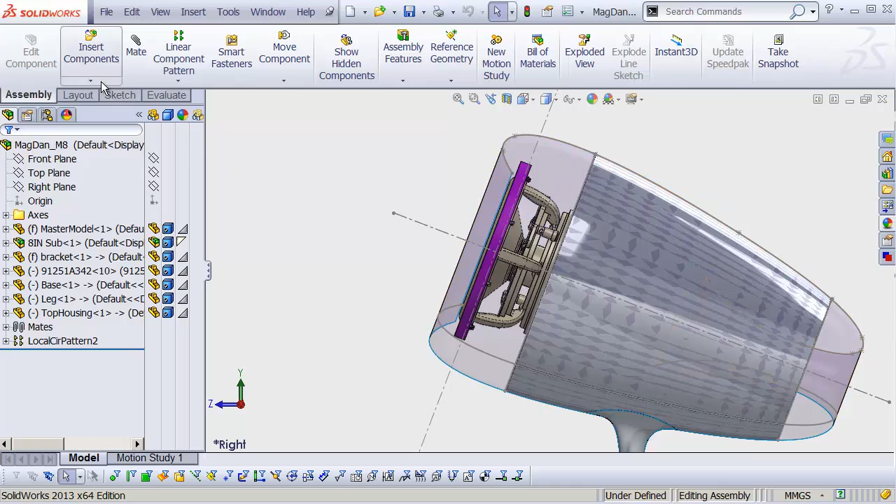Front plane, same as always. We'll rename this front nose. I don't know, I'm making up these names. I'm going to right-click that and save part in external file and hit OK. Same as always, we'll open that up, insert our master model, and hit OK.

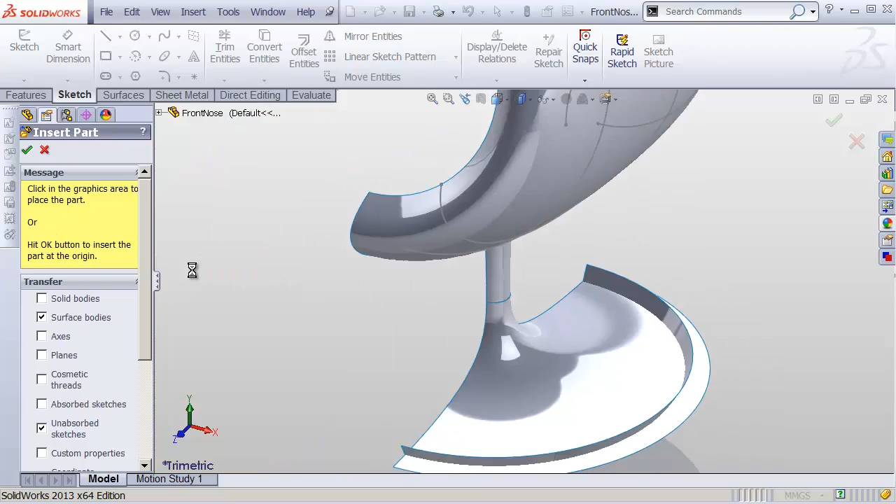We just need the surface bodies and unabsorbed sketches. And we actually only need that big fuselage piece. We don't need any of these other pieces, so we'll just delete those out right off the bat, just to clear this all the way out.

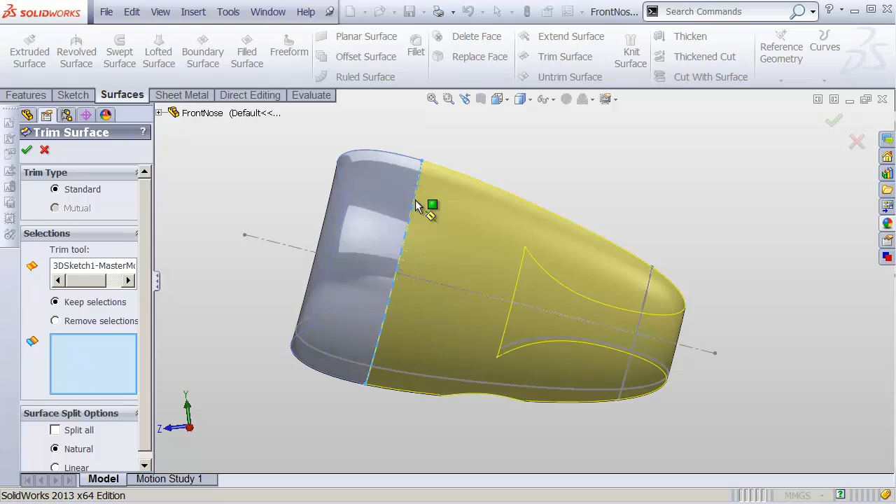Now, the next thing is to trim back this surface a little bit. So let's go to our surfaces. We'll do a trim surface, standard mode, using this front guy. And this time we're going to keep the front nose cone of this. Hit OK, and we're left with just that surface.

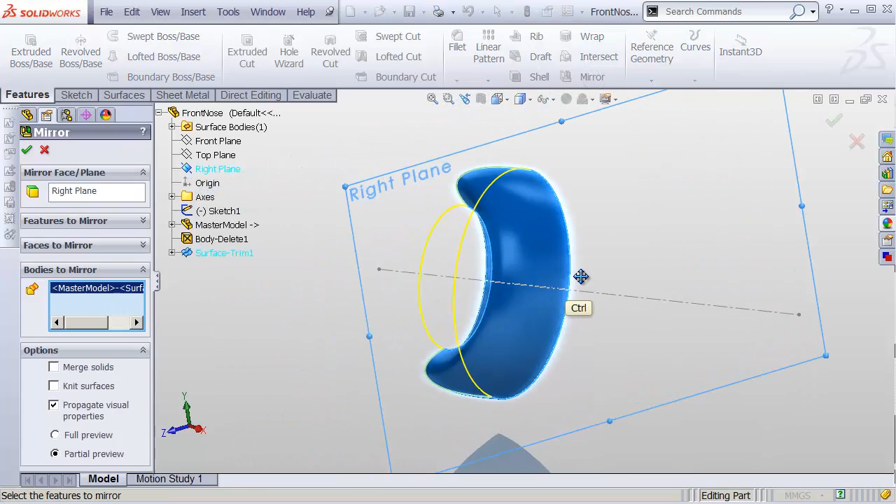From here, I don't even need any of these sketches, so I'm going to hide the sketches as well, just to get those off my screen. And let's call this a nice, I don't know, purple color. I'll grab the right plane, Features tab, Mirror, and under Bodies to Mirror, let's choose that surface body. Make sure to check the box for Knit Surfaces. Hit OK, and that's going to merge that all together into one big round thing.

Now, this one we're going to use a different method for making it solid because it does have an undercut, and it's actually going to be pretty straightforward to do. Let's go to our Surfaces tab.

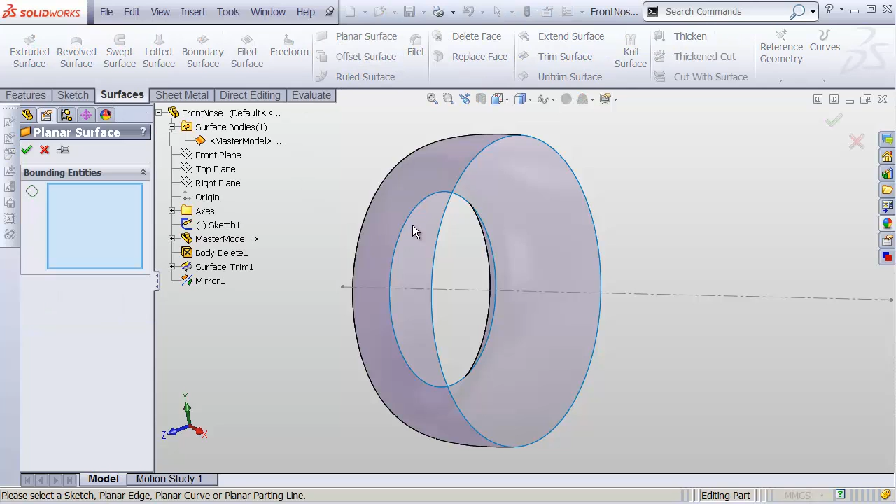We'll do a planar surface right here and hit OK. We'll do another planar surface on the other side and hit OK. And then finally, let's just knit those together - this, this, and the back face. Make sure to check the box for Try to Form Solid. If you don't check that, this won't work. Hit OK, and now we have a solid chunk.

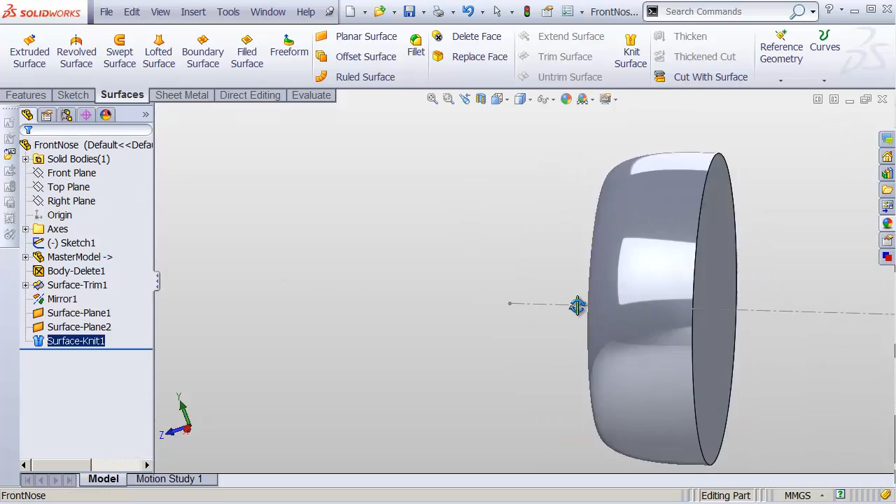And I know that this is solid and not just a closed surface body because over in my Feature Manager design tree, I have a folder called Solid Bodies, and this body happens to be listed underneath that folder. So I know this is a solid without a doubt.

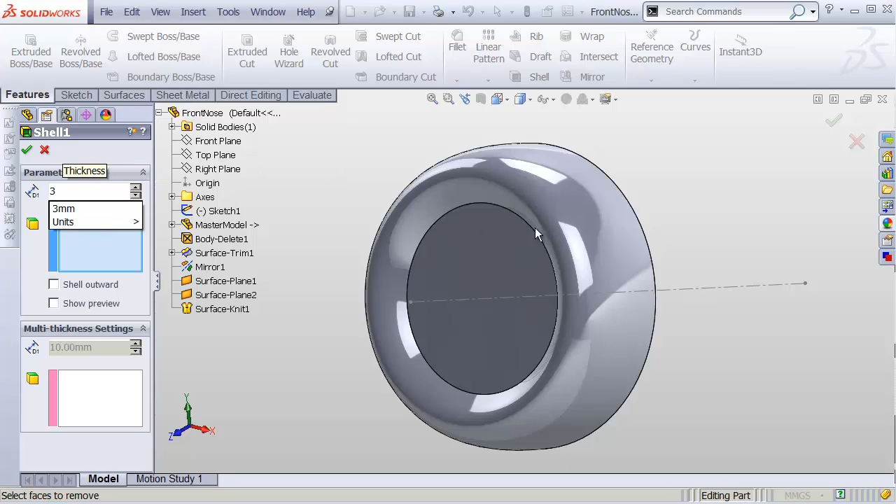Next, I can go to my features and over to Shell. And once again, let's do a 3mm shell. I'll just click the front face here, but also the back face. Hit OK, and that's going to hollow that out to 3mm all the way around. So I'm left with just the final part as I want it to be.

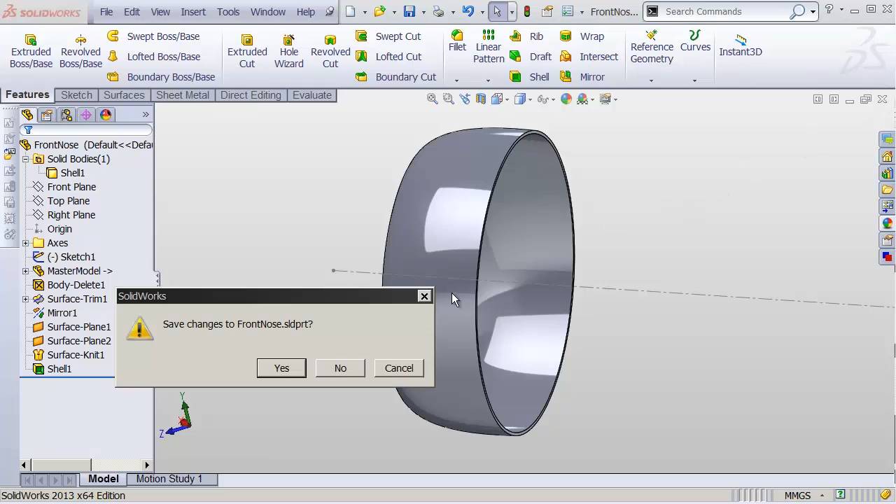Now, obviously, I'm going to need some mating features in here and stuff like that in order to be able to connect this with the rest of the design. But we're going to save that for later. Let's close this up, go back to our assembly. This thing is starting to take shape here. Really, all we're lacking is this back piece to have a pretty complete looking model.

I'm going to hide the master model for a second here. And just for fun, let's go ahead and apply some materials to this, just because we're getting to the point where that's going to be a fun thing to do. Next, I'll edit that part, because I was editing that front nose part in context.

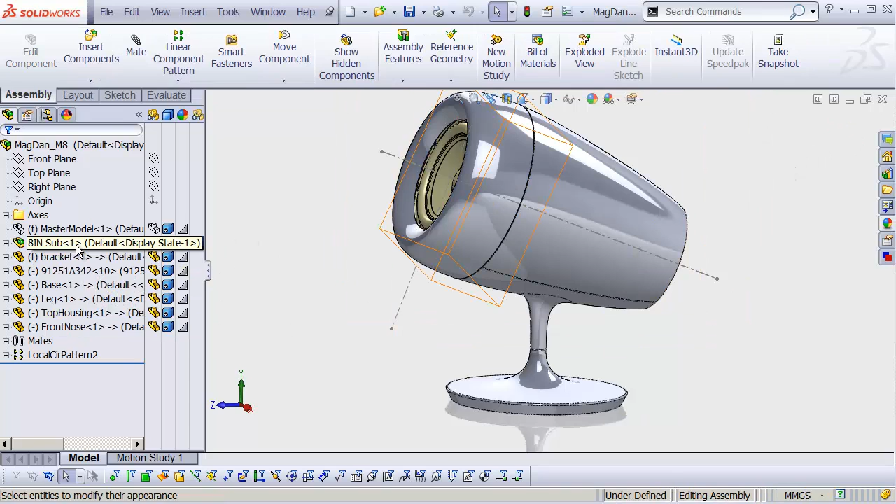We'll go up to that 8-inch subwoofer subassembly. Click on that appearance that we assigned, and click Remove Appearance. It's going to bring it back to its default appearance, which looks nice.

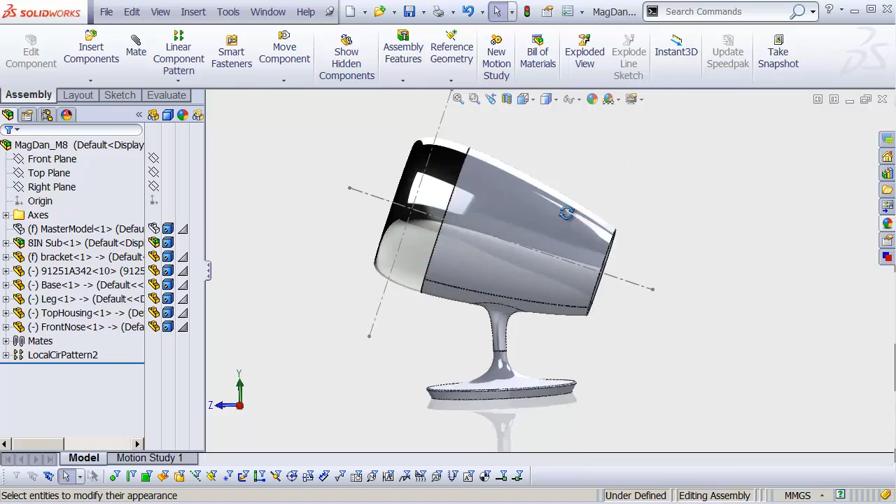Then I'll go over to my materials here. Let's go to my metal materials, expand that down. We'll grab a chrome, and I'll do a chrome plate on this front piece here. We'll do that for the entire front nose body. Oh, that looks sweet. Oh, so sweet.

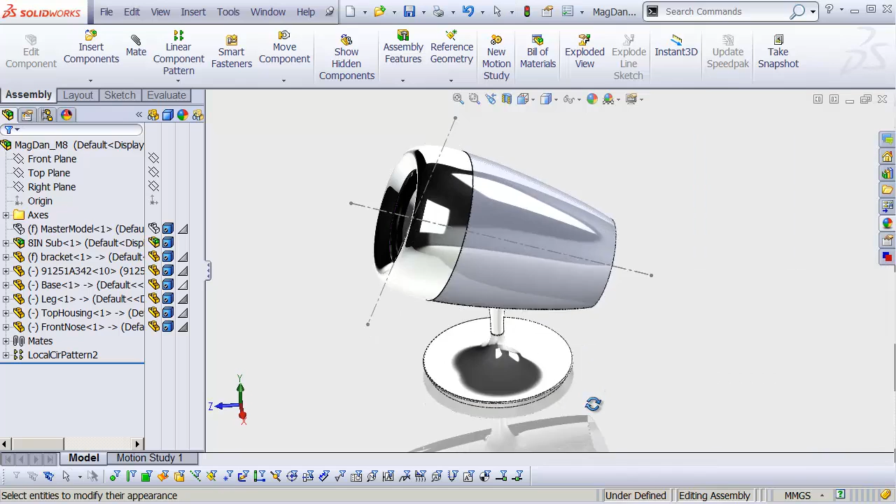And then I think the idea was that the bottom of this would be chromed out too, so why don't we just do it all the way. Let's go chrome all around, baby. Chrome it up. That's looking all kinds of crazy. I don't even think I like that much chrome. What about brushed chrome? How about that? I liked it better before.

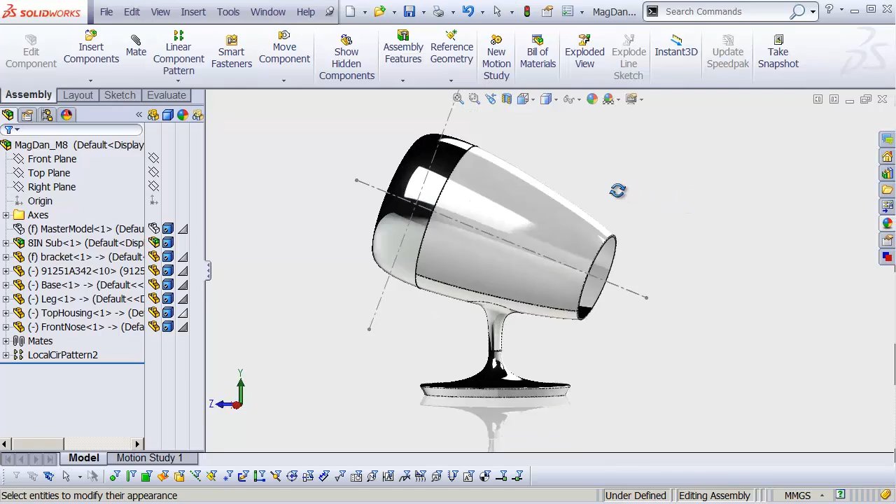Yeah, sweet stuff. Then we can go to, I don't know, let's go to painted materials here. We'll go to sprayed paints, car paints, how about. I'll grab a white car paint, drop it on here, in that top housing. That's looking so cool. Oh, that is so sick. All right, I can't wait to add some more detail to this.

All right, let's move on.